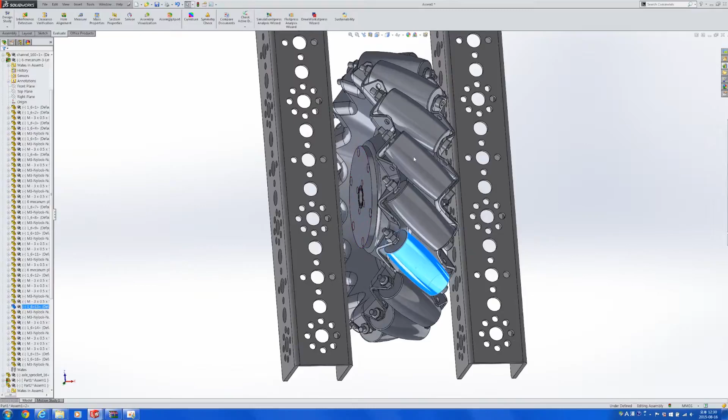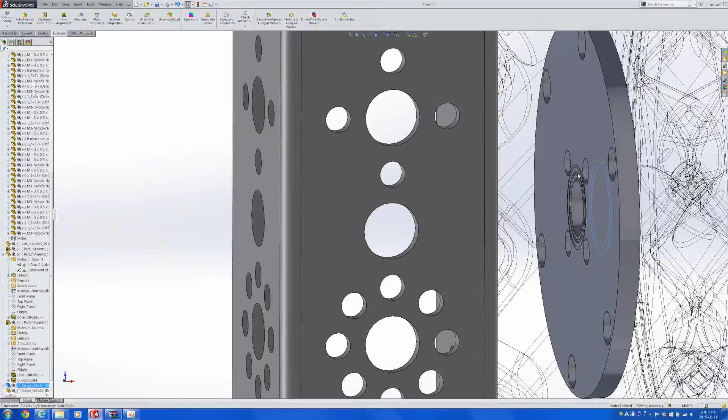Hi everyone. In the second part of the video, and actually the 8th one that I'm making right now, I'm going to show you how to design an axle to fix this wheel onto these chassis. So if you wait up and see, let's go ahead and make this part not as visible once again. Wireframe. Right up till here, we are going to have the axle be 8 millimeters thick. From here to here, it's going to be around 10 millimeters thick, and then again it's going to become 8.

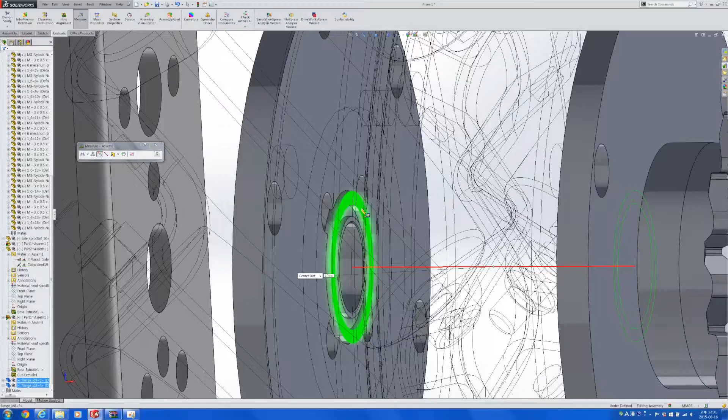So let's go ahead and try to design the axles. First, let's measure the distance between the two parts that would have to be of the length that we desired, 27 millimeters. So let's make a new part. And as you know, an axle can be easily made by rotating. For some reason this is not working well.

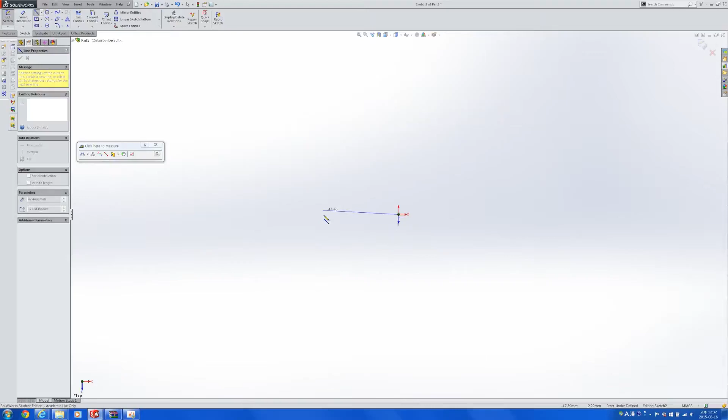Top plane, let's... 0, a little higher, and yes. We want this to be 27 divided by 2 millimeters. We want this to be 8. We want this to be 10. And say we want this to be, I don't know, 25.

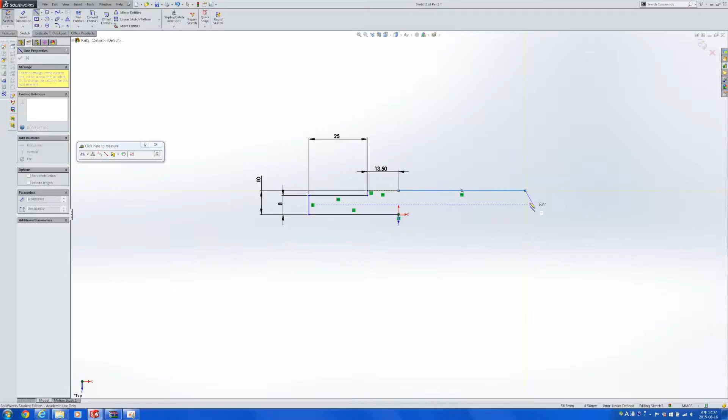Actually, let's get rid of that, and draw something else like this. Of course, we want these to be equal. We want this and this to be equal as well. And let's say that one place is a little shorter, and say this needs to be 20. This moves around, so just to make it look all black, let's do that.

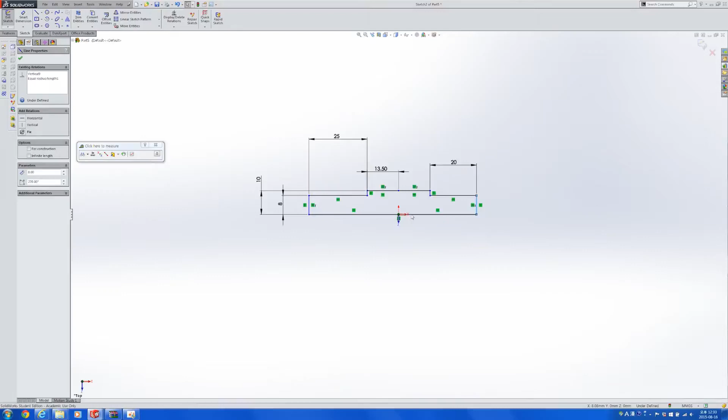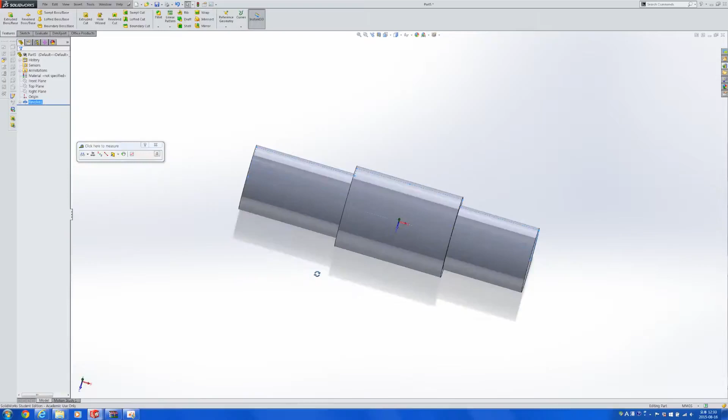Let's make this vertical to that. Now this is fully defined, and now we can revolve this around this axis, and we have a very crude axle. This is just very, very crude. Axle, not axis. But let's go ahead and insert this. Concentric.

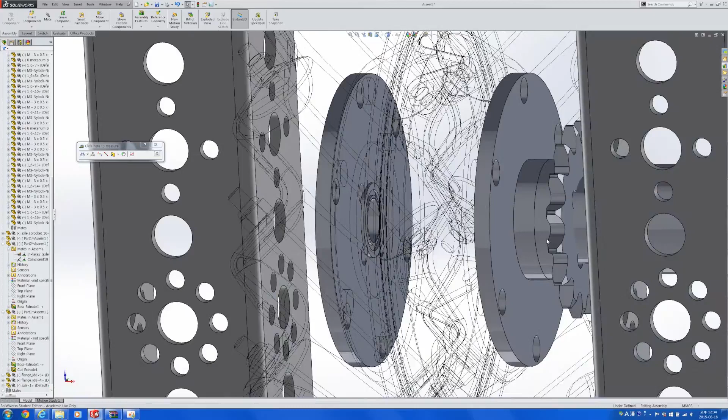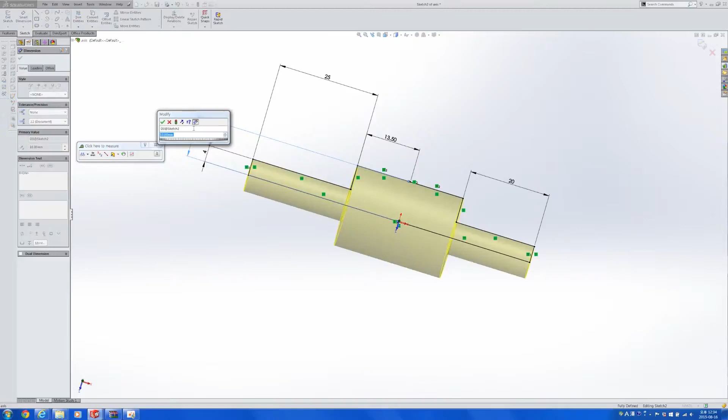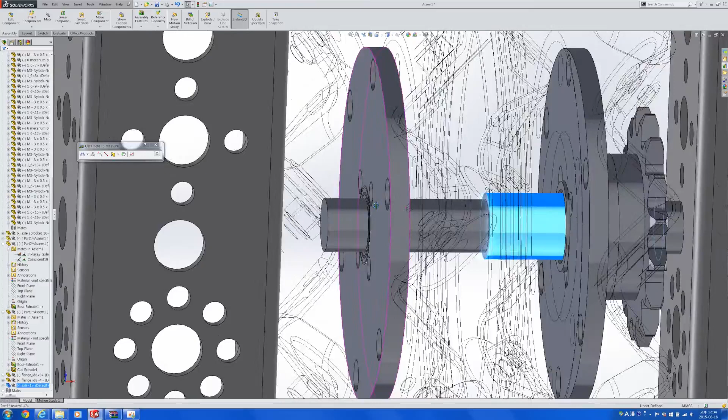Oh, common mistake. Since we are rotating this, it has to be 4. And we have to go and change this as well. This has to be 8. No, that's not 8, that has to be 5. Like this. Now that looks better. Let's go ahead and mate these two. And you can very easily see that once we put these parts in and bolt them, this is not going to get out.

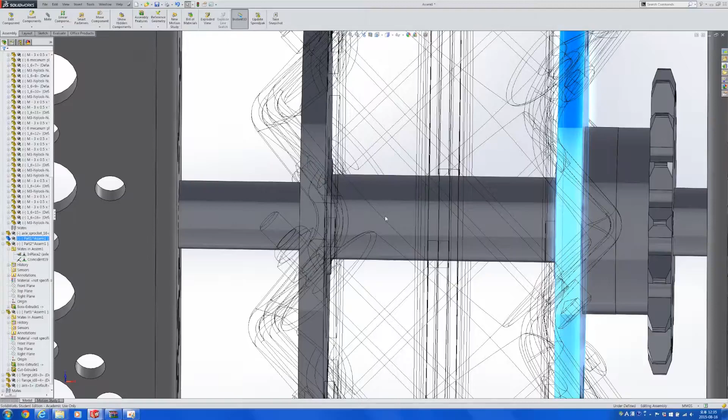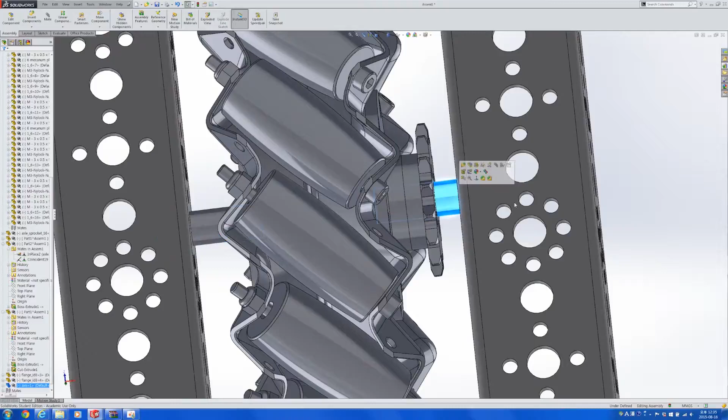So that inside part we are done caring about. Since we don't have to look at the inside anymore, let's make the component display shaded with edges. And now what's up to us is we have to vary the length of this axle to put it in the desired positions, for example, here and here. We want this axle to be at the edge, so let's see around how long this has to be to get there. Normal distance is about 50 millimeters.

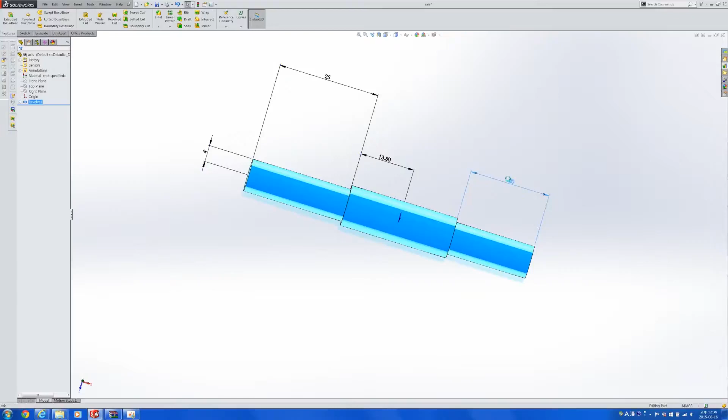And say let's make this 50. If we want this to be around here, that axle needs to come out a little bit more. That's 2, so let's make it 3. Let's increase the length by 3, 53.

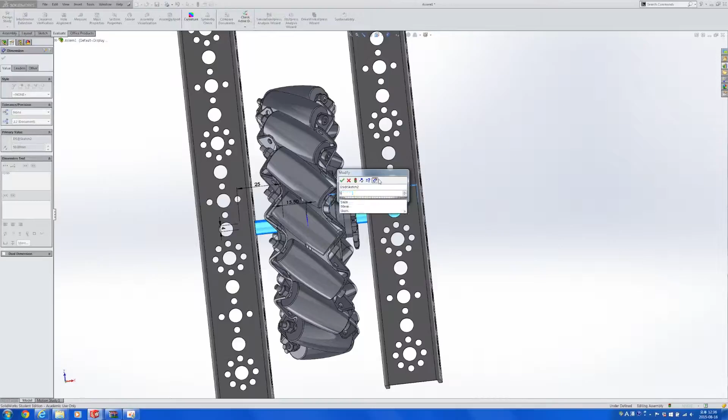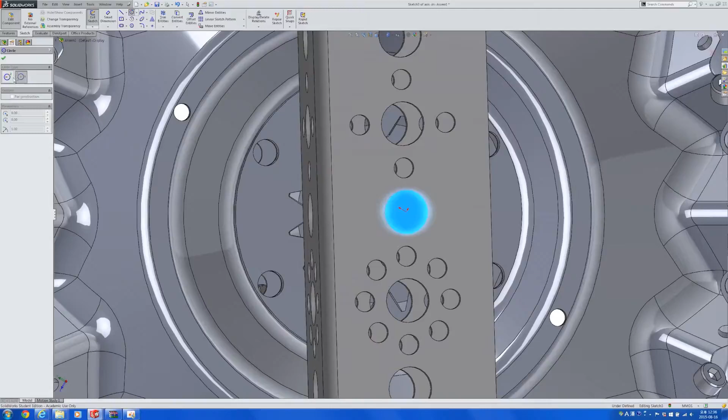And what we're going to do when we make this axle is make a tap hole. So right on this edge, we're going to drill a hole that you can bolt something in, say an M3 or 6-32 hole, both of them would be fine. And after making that hole, you can use a random plate to screw it up over here so that this does not move. I'm going to show you how in a very short amount of time.

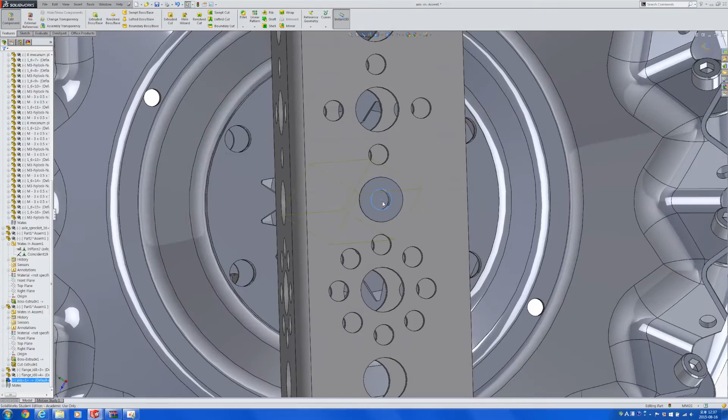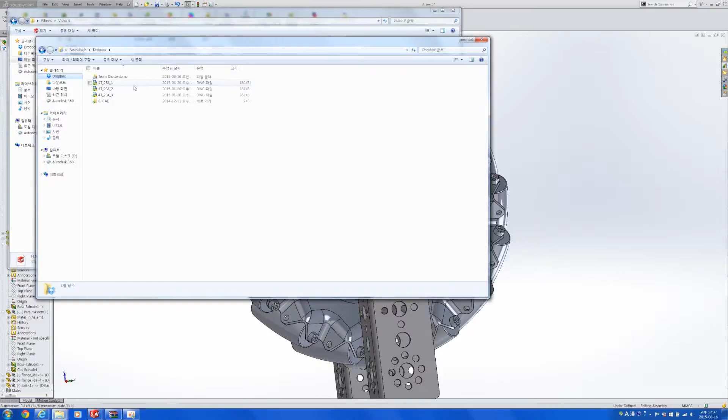Let's make this 3.7. Make a tap hole for say 5 millimeters inside. Now we have a hole over here. Make this coincident. And you can use anything, say, I'm going to try using a TETRIX part because that's something that we have very readily. Not an angle, say a bar. Say you have this bar, a random bar lying around.

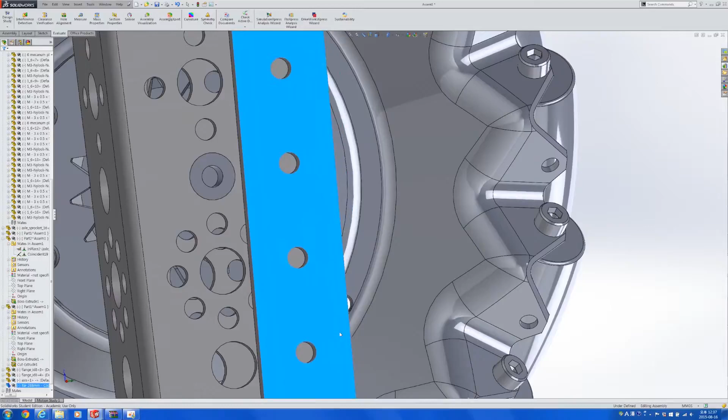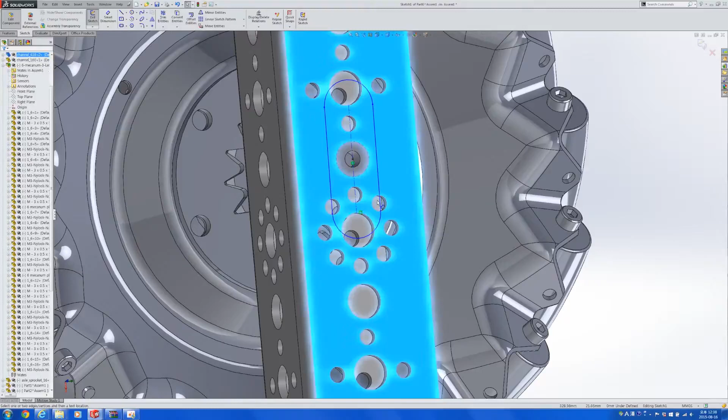And what you can later do is drill a few holes on this bar in other places. No, actually it might be just better to show you how to make a new part. Let's insert a new part on this plane. It's going to be centered on here. It's going to get up till there. The distance will be say 10.

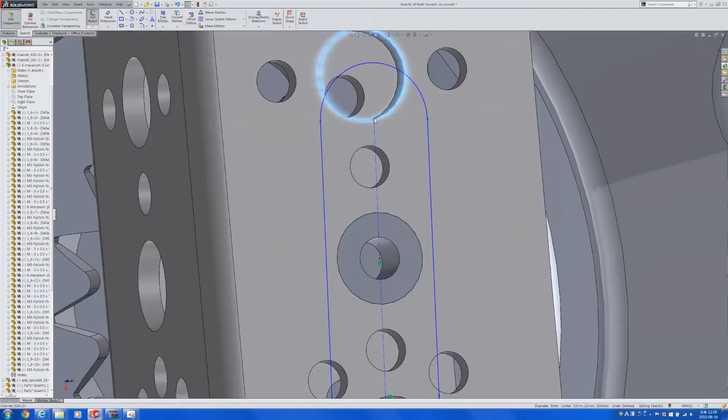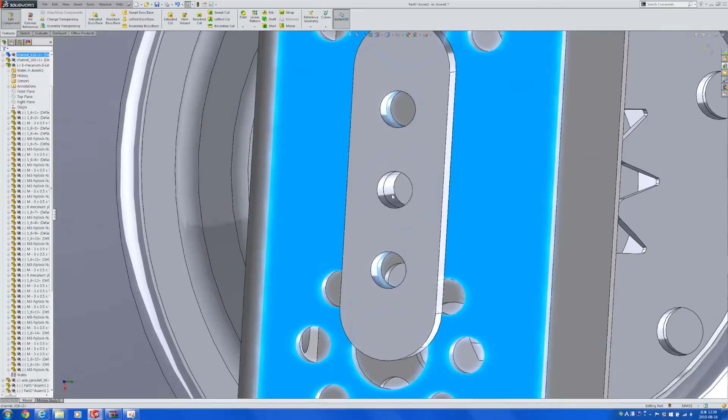And let's say I want this point to be coincident with that as well. Now this is defined. Let's make 3 holes. Extrude that for 3 mils. Now after this, you can just bolt this here. So bolt the axle in with this plate, and bolt the plate onto this side. And now your axle will not be able to move from this side, and you can do the same thing

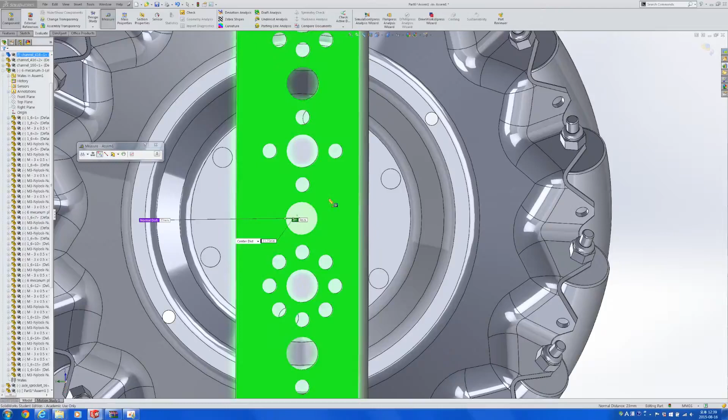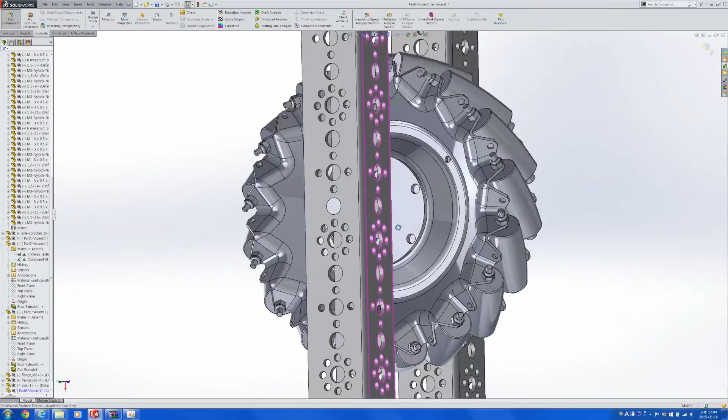to the other side. For example, right now, what's the distance between this and this? The distance is 23, and we know that it's going to be a very clean number because we took time and effort to make the inside length very clean, and the TETRIX hole patterns have clean numbers inside. So make that 48. Now this will be right there perfectly.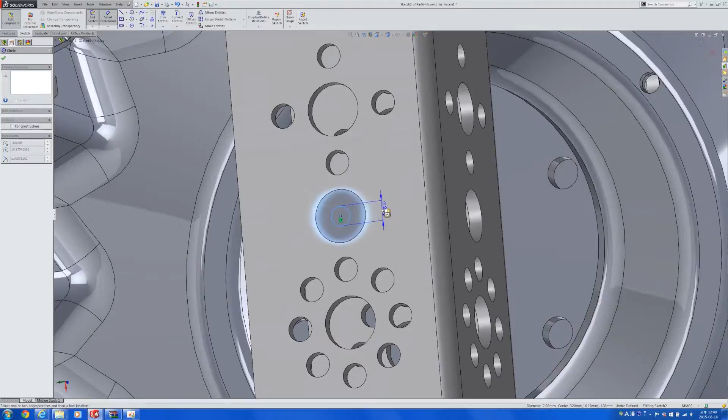Let's make that tap hole once again. So I want to sketch a hole there. And then cut extrude for 5 mils.

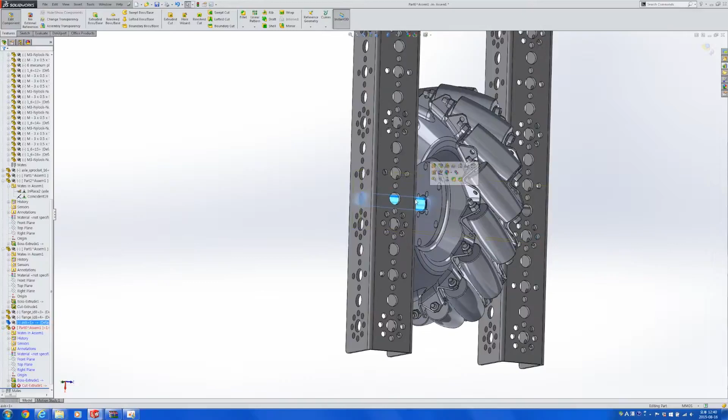Cut, extrude. Okay. I went to the wrong place for some reason. I want to edit this component. So let's edit that component. Sketch there. A circle. That is 3.7. Cut, extrude. 5 mils. Boom.

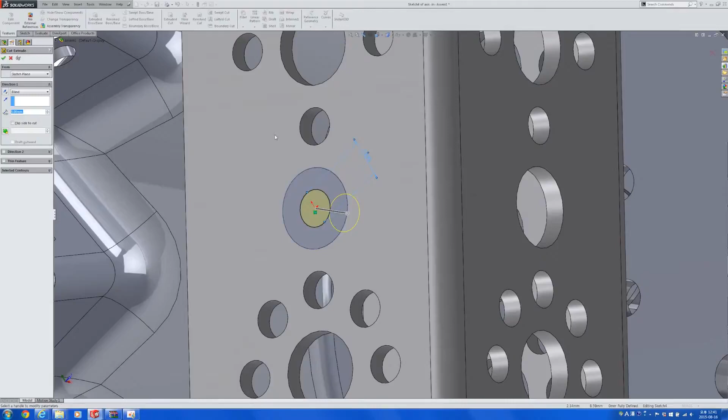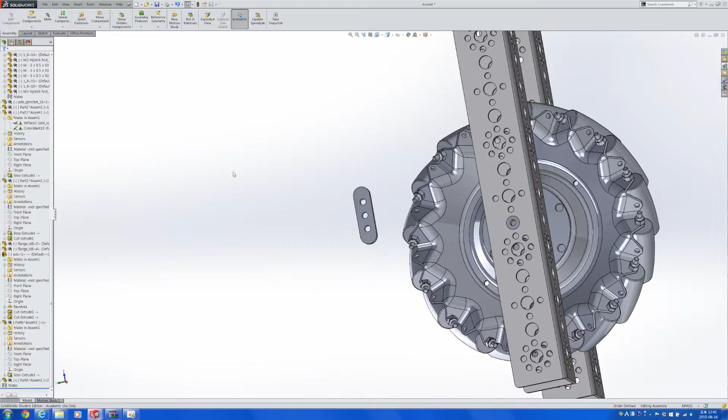We have that. And we can just go ahead and copy that part like this. Let's go into the mate menu. Here and here. Here. And here. Then here. And here as well.

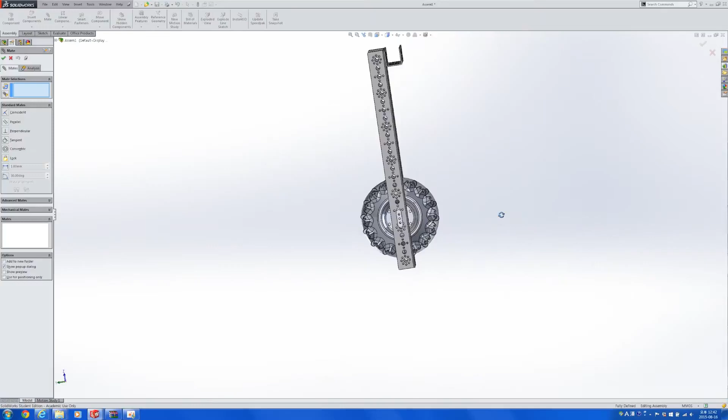And now you can very easily see that this is not going to move side by side. It's going to rotate very prettily. And since we have ball bearings, it's going to be a very smooth rotation as well.

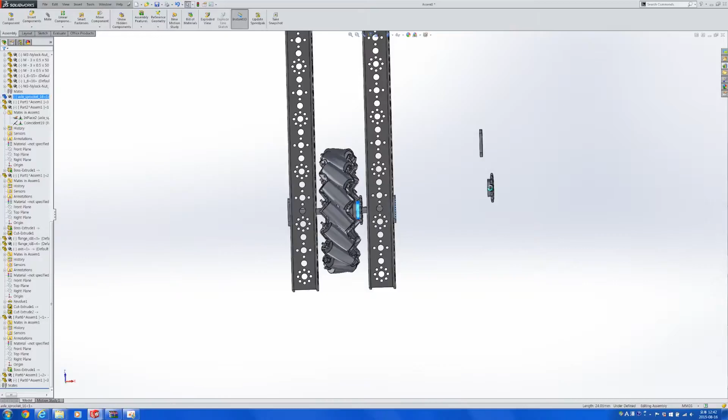So now if we go ahead and see the different parts that we made for this, we will need 2 of these, 1 of that, 2 of these plates, and 1 axle. These parts are the parts that we need to manufacture in order to use this for 1 wheel.

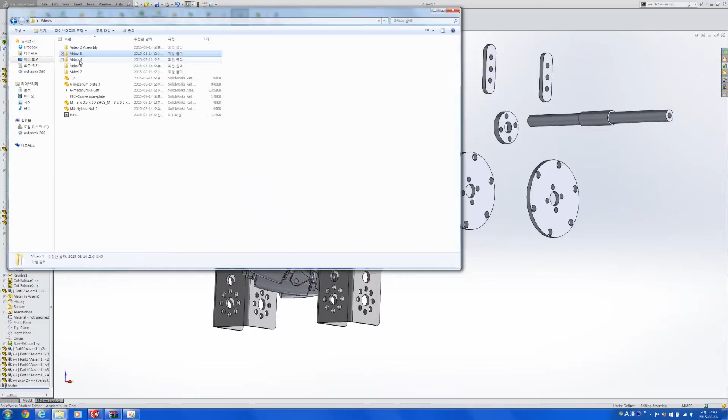And honestly, I do think that this is a much better simplification compared to the one that we had before using all those different TETRIX kits. Let's go look at it once again. Look at how complicated this is with so many different parts, and this is not even finished. It doesn't have a ball bearing, so it's not going to rotate that smoothly. And you also know that the TETRIX axles are infamous for breaking under pressure.

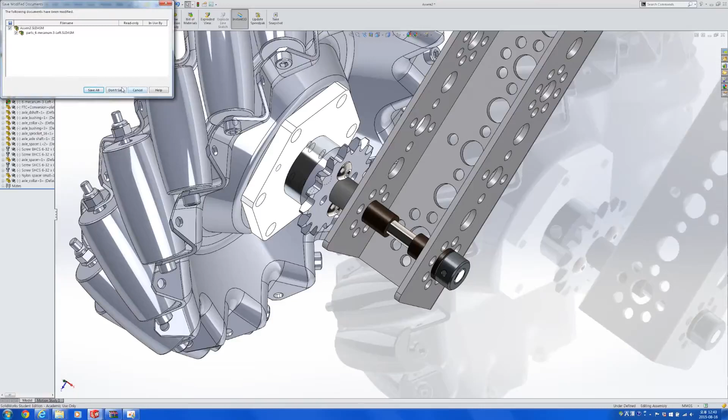And this is a much cleaner, simpler way of connecting a wheel to a body. And I think that even if people are not using these mecanum wheels, for any kind of wheel, this is a very, very good approach to make whatever thing you're making have better wheels, and for the wheels to be a lot stronger when you are putting them under pressure.

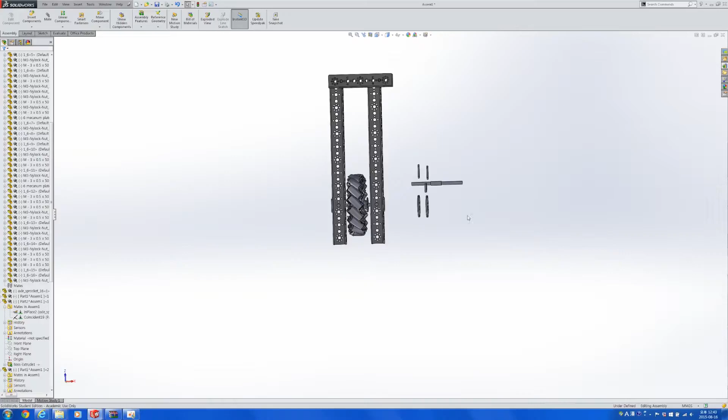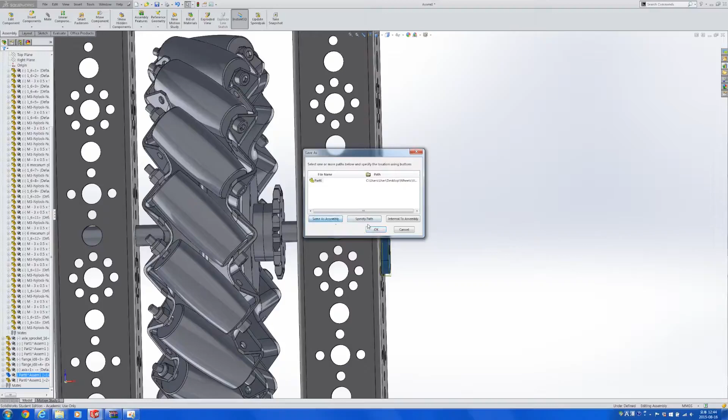If you want to make these parts, however, you'll have to save them in a different pattern. So let's go ahead and save the parts externally so that we can access them outside. So let's save this part in an external file, same as assembly. Let's go save this. Let's go and save this as well. Save part in external file. Now let's make a new assembly.

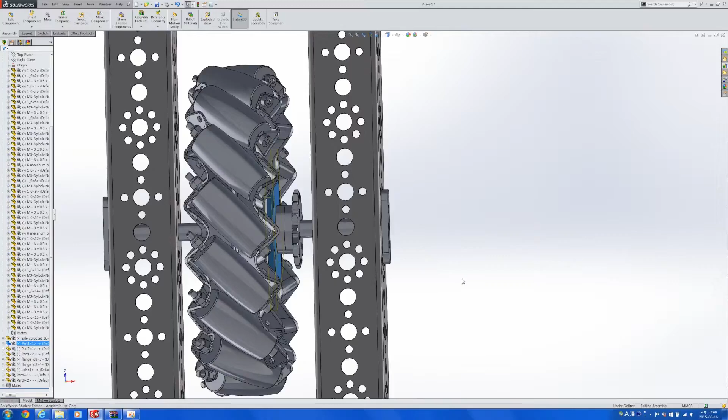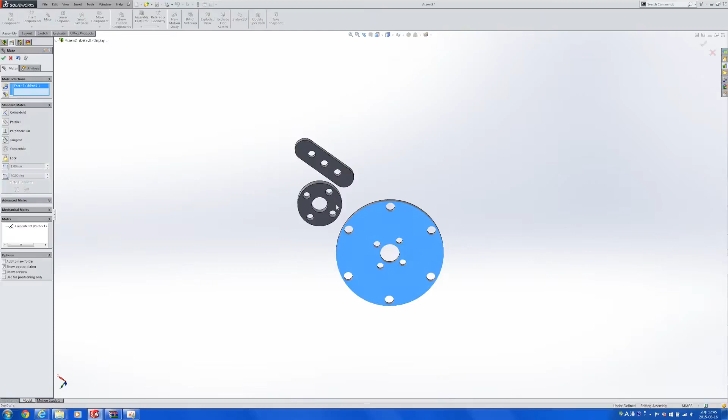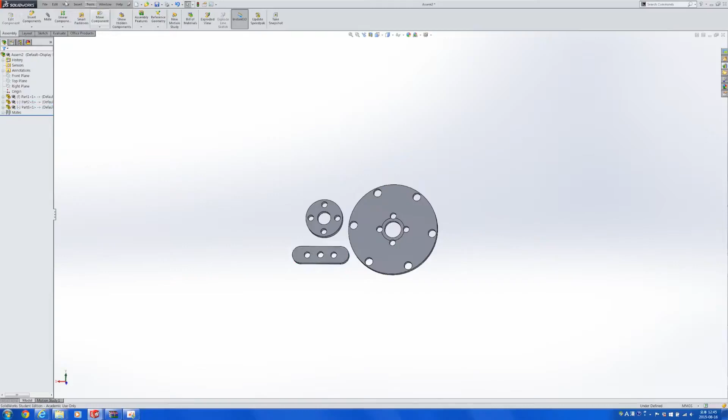All these are parts that we need, and also remember we'll be face milling it, so make sure that this side faces the top. When you're actually doing it, if you want 4, you'll have to make 4 copies of this. Say 1, 2, 3, 4, and then put them in good positions to send them. But for now, let's say we need just this set. What we have to do is save it as a different kind of file so that the people in the manufacturing centers can just go ahead with their work.

We have to save it first as a part. You save it as a part first. This may not sound intuitive, but please wait a little bit. Now that you saved it as a part, you can open it, and now you can save it. It's a drawing file, .dwg. This. And let's do that again. Wrong click. Drawing file. Say we all want to print these out in 3D.

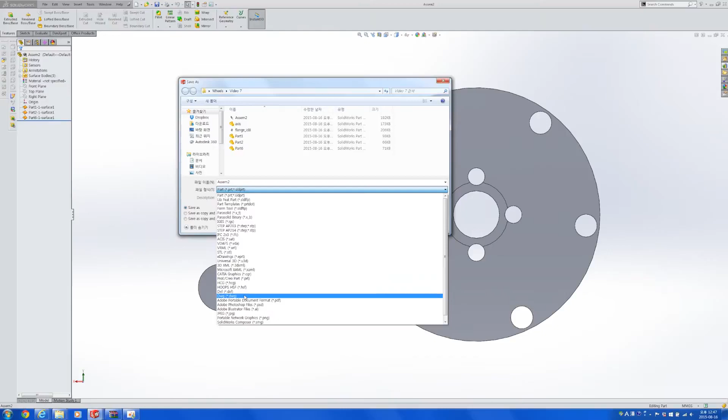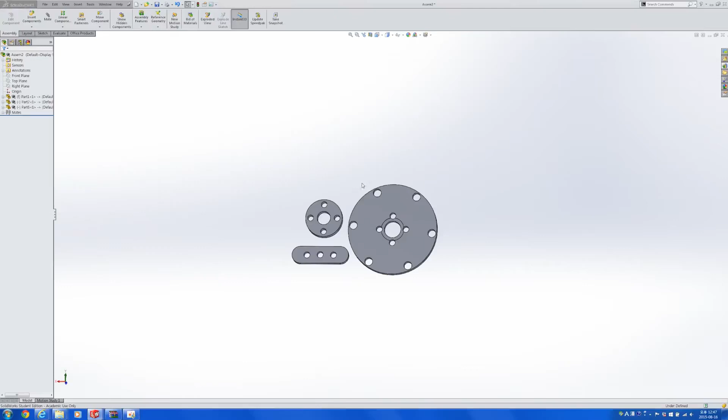So before doing anything, you have to do this and then save it as a drawing file, because you want to export it in the direction that you're looking at so that it looks correct. Current. And this is what it will look like. Press yes. No, I don't really need to save that for now. And let's go ahead and then open this up.

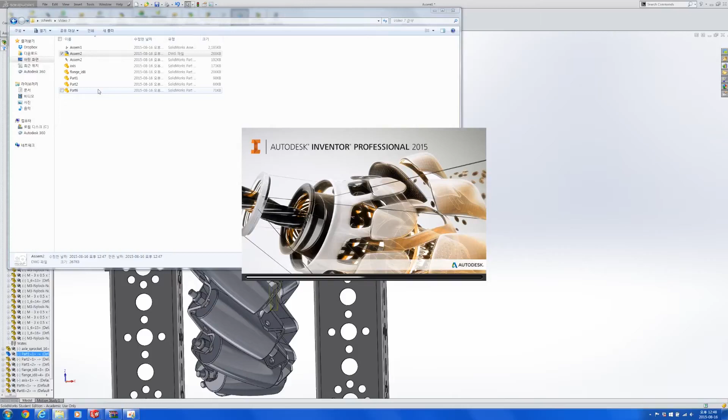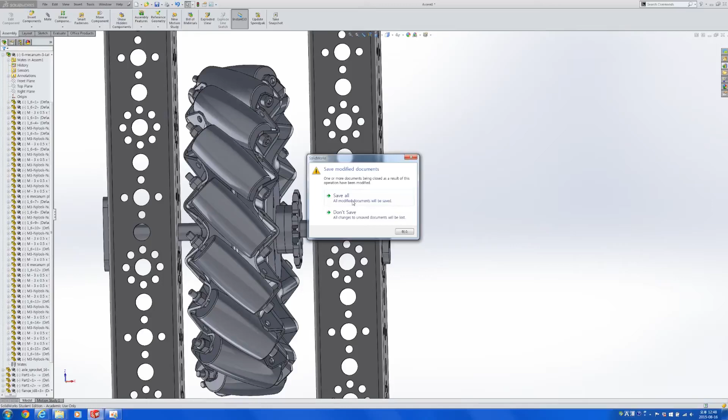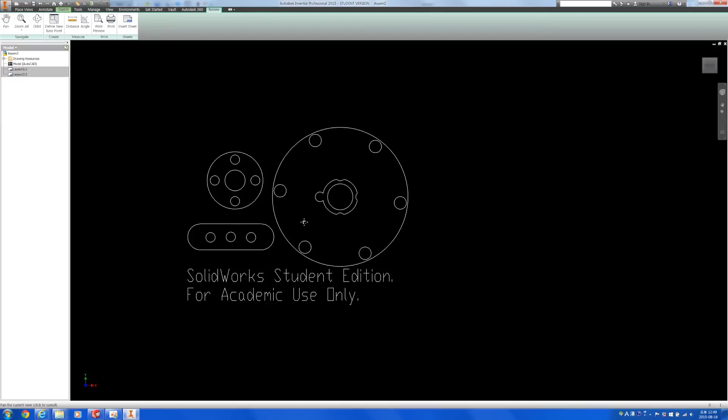Drawing files are native to AutoCAD, and since these are two-dimensional parts, they can easily be manufactured on a 2.5 dimensional CNC simple table milling machine. Inventor usually takes a very long time to open up. Let's wait a little for Inventor. So we know Inventor's coming up. Let's wait a little bit more. Yes. So Inventor is here right now, and you can easily end up using this.

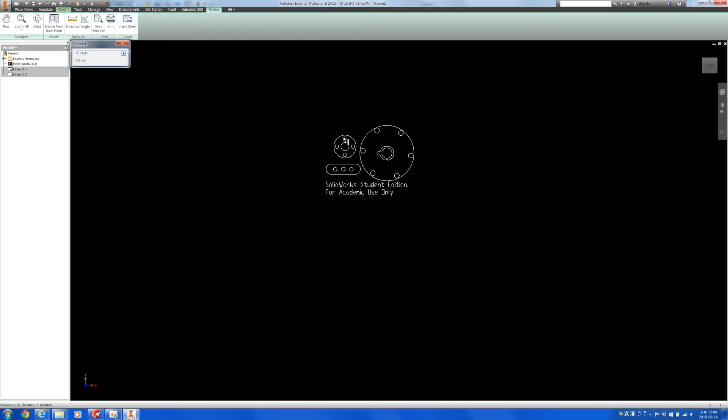Sometimes something that you may want to check is seeing if this measures correctly. Sometimes if the dimensions that you export are wrong, it's not going to show correctly on Inventor or AutoCAD, which is a problem when you're actually trying to manufacture something.

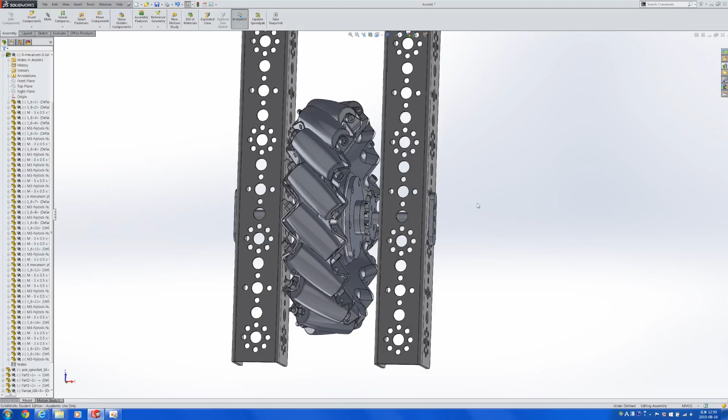That is the end for today. This, I hope, is a method that you find very useful when you are connecting a wheel onto a base. But also, this is just a very simple exercise on how you can simplify axle lengths by face milling different parts, so that whether it be you or the person making it for you, can have an easier time making the entire thing.